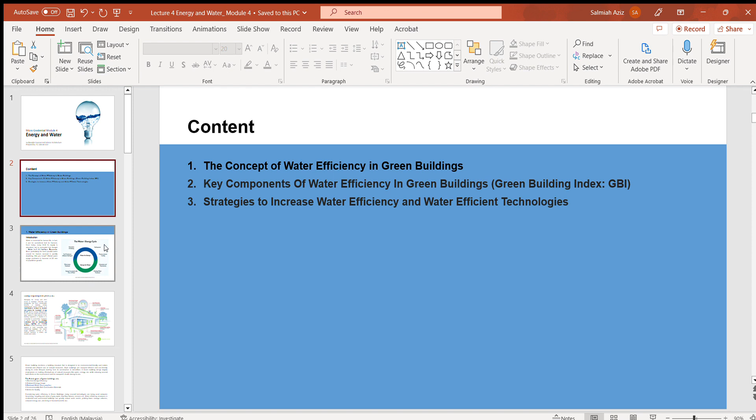So basically, we're gonna check on water efficiency in green buildings. Water is essential for human life. In fact, it can be considered fuel for humans. Even today many think its supply is abundant, but that thought is contradicted. Water is not a limitless resource. More particularly, the fresh potable water crucial for human survival is quickly depleting.

Did you know? Global water usage continues to increase at two times the rate of population growth.

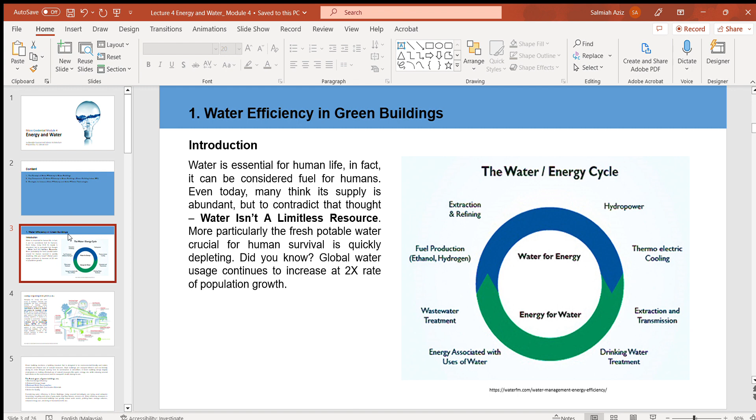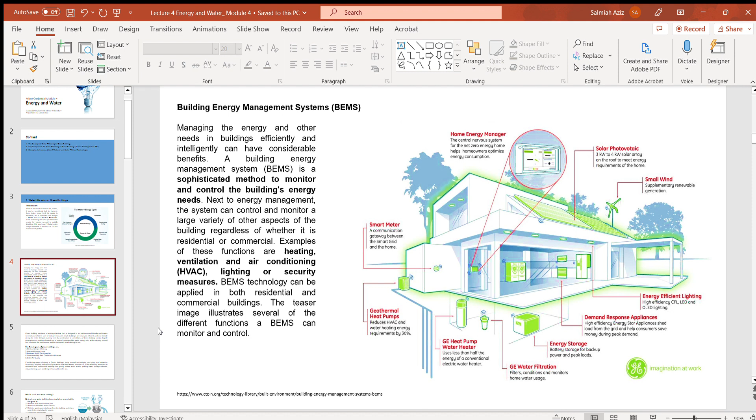We go to this, I'm gonna skip this one. But by the way, for nowadays design, in terms of water consumption or whatsoever, we could use a smart system to manage the amount of water every day. We can check, we could evaluate, and we could identify how much water every day we gonna use. So using this smart meter or smart control is really helpful to the building design.

Green building means a building structure that is designed to be environmentally friendly and makes minimal and efficient use of natural resources. Such buildings are resource efficient and eco-friendly during its entire lifespan, starting from construction to demolition. A green building design largely emphasizes making effectual use of natural resources like water, energy, etc., while reducing several bad effects on the environment and the occupant health during its use.

The 5 main gears of green buildings are site and design efficiency, reduce energy usage, reduce water consumption, environmentally safe construction materials, and better air quality. Okay, considering water efficiency in green buildings.

Today, there are so many technologies being used: rainwater harvesting, recycling and reuse of grey water, low flow fixtures, sensors, etc. Water efficiency measures in residential and commercial buildings can greatly reduce water waste, yielding lower sewage volumes, reducing energy use, and bringing in financial benefits too.

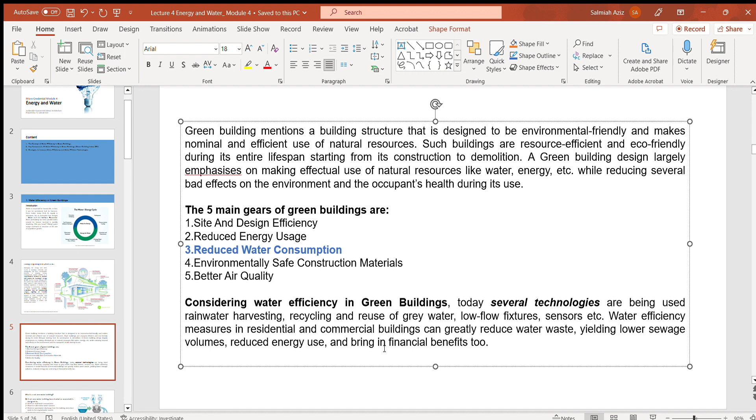There is something that you should look at and study in detail - it is about a net zero water building. What is a net zero water building? A net zero water building, constructed or renovated, is designed to minimize total water consumption, maximize alternative water sources, minimize wastewater discharge from the building, and return water to the original water source.

Application of reuse water, and also application of water efficient technologies. Net zero water creates a water neutral building where the amount of alternative water used and water returned to the original water source is equal to the building's total water consumption. The goal of net zero water is to preserve the quantity and quality of natural water resources with minimal deterioration, depletion, and rerouting by utilizing potential alternative water sources and water efficiency measures to minimize the use of supplied fresh water. This principle can be expanded to the campus level as well.

So if you look here, the diagram measuring net zero water. This is the elements of the net zero water building, where it is using alternative water from rain or reuse - we retreat the water as well. This is alternative water for the building. If you look into treated wastewater, this wastewater is already being used in the building, but we could treat it to reuse it again, especially for planting and washing as well.

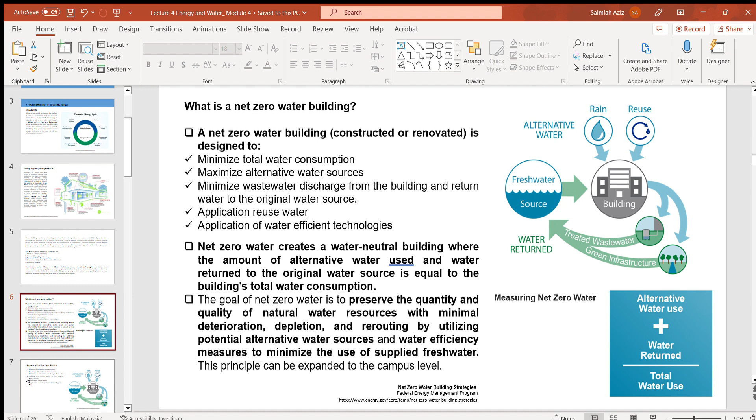Okay, and also green infrastructure where this is water return. So treated wastewater is returned to the building as a fresh water source. There is a calculation or formulation to measure net zero water, which is alternative water use plus water return equal to total water waste, total water use.

This is a very important input that you should look at in this module to check on net zero water building. Even nowadays, if you are an architect, designer, or engineer, it is recommended to design something green regarding water consumption. How is the occupant going to use the water in the building? We should look at this in detail.

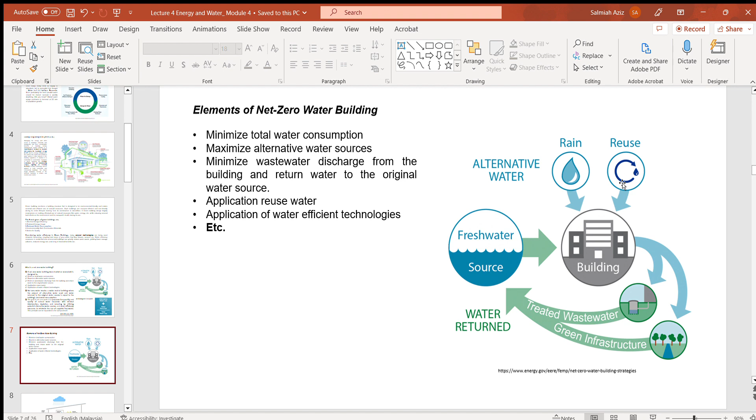Okay, net zero water building, same thing. This is how the elements of net zero water building look in the section drawing. We look here: drinking water sinks, hot water pressure tank, potable water treatment train, with UV carbon particle treatment.

This is the stuff collected from the rain. This is a vortex filter, collected from the rainwater. So this is rainwater harvesting: vortex filter, first flush tank, reservoir. If the rainwater is not filtered, we could just use it for the gardens. But if you filter it and also treat that rainwater using UV, we might use it for drinking water as well.

Okay, so this is the grey water tank filter, and here are the indoor grey water planters. By the way, for the grey water tanks and filter, it is not recommended for drinking. So it's only for outside or exterior use, not for the human body - not for drinks, not for cooking at the kitchen. I can say it is forbidden to use for our body. It is not recommended.

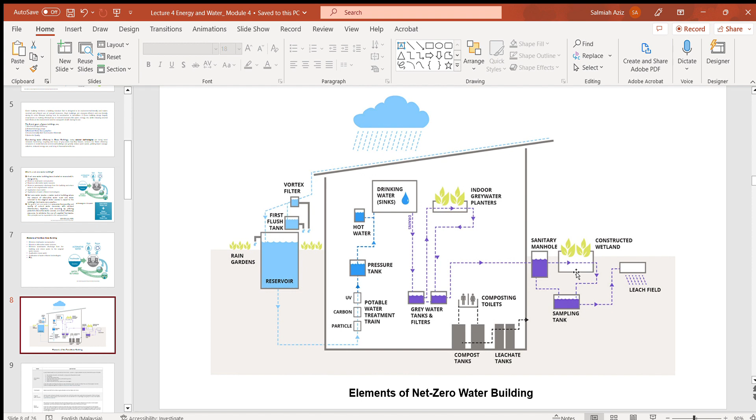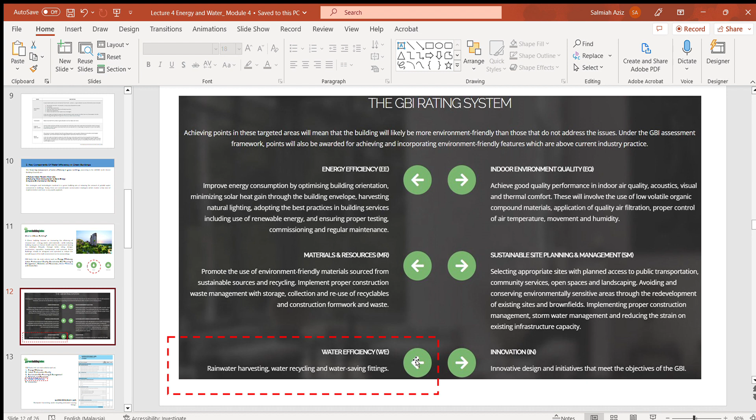If you look at GBI, there is water efficiency in the assessment. This is water efficiency, WE: rainwater harvesting, water recycling, and also water saving fittings. It is one of the GBI assessment criteria in Malaysia, to apply and deploy water efficiency for the building.

There are so many subtopics under water harvesting and recycling here for the GBI. You could check these notes, handouts, or sheets at the GBI website. You can find it there and download it.

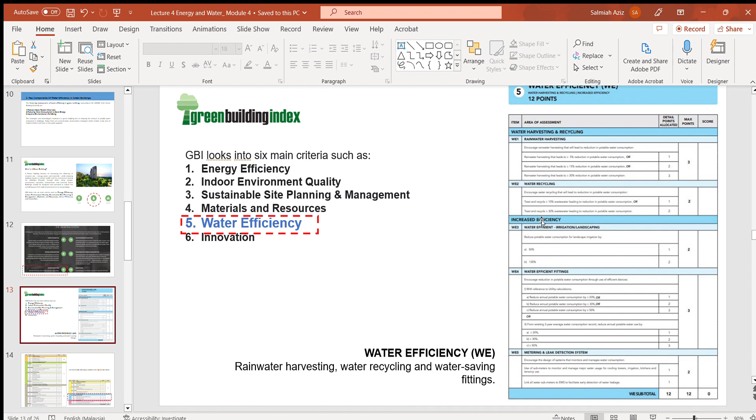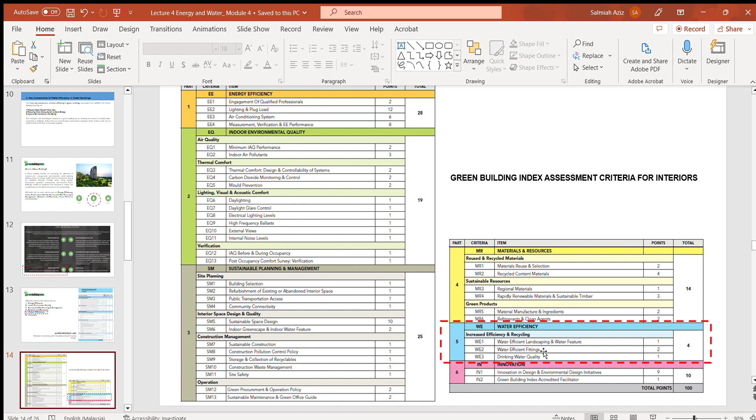In detail, water efficiency for the green building index assessment criteria for interiors includes WE1, water efficient landscaping and water feature; WE2, water efficient fittings, more relating to technology stuff; and WE3, drinking water quality. If we could apply these three elements in the design for water efficiency, you're going to get 4 points for GBI.

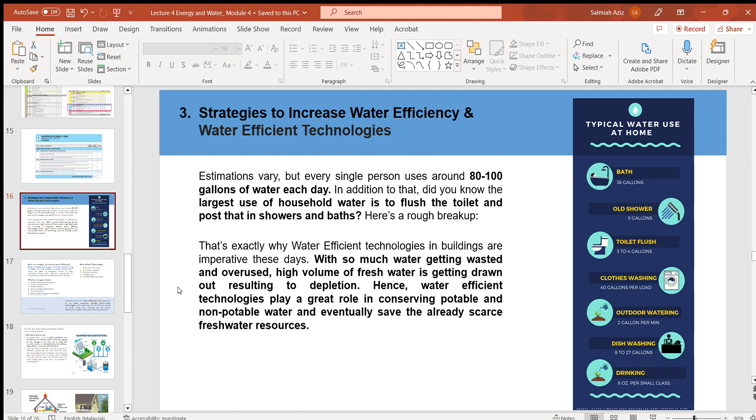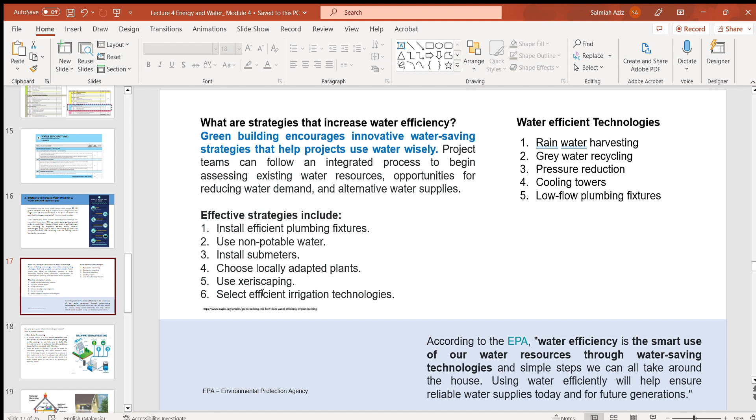Others are at the same detail level. This is more like strategies to increase water efficiency and water efficient technology. There are a few things we could use, such as effective strategies including install efficient plumbing fixtures, use non-potable water, install submeters, choose locally adapted plants for landscaping, and select efficient irrigation technology as well.

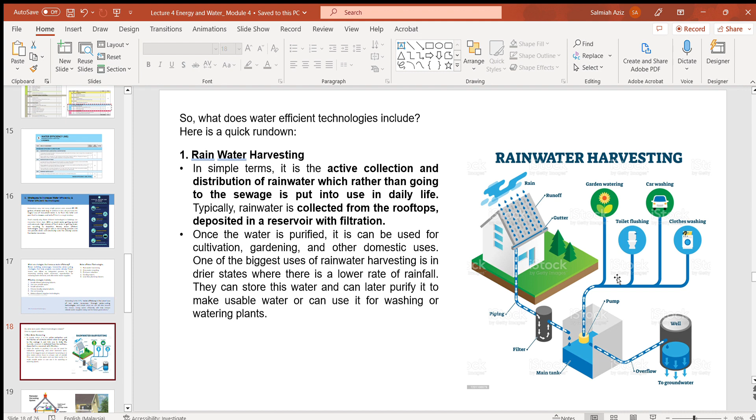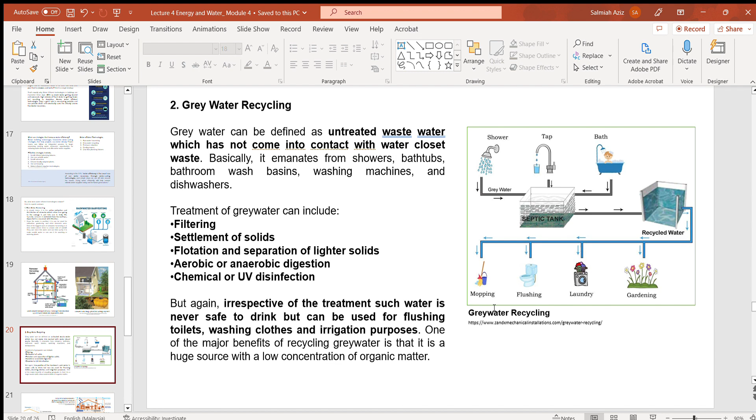One water efficient technology is rainwater harvesting, which I just mentioned to you, including the idea and the methods. And then grey water recycling, where we could use again the water that we have used in the building, reuse and recycle it back for the garden and also washing - this is the methods.

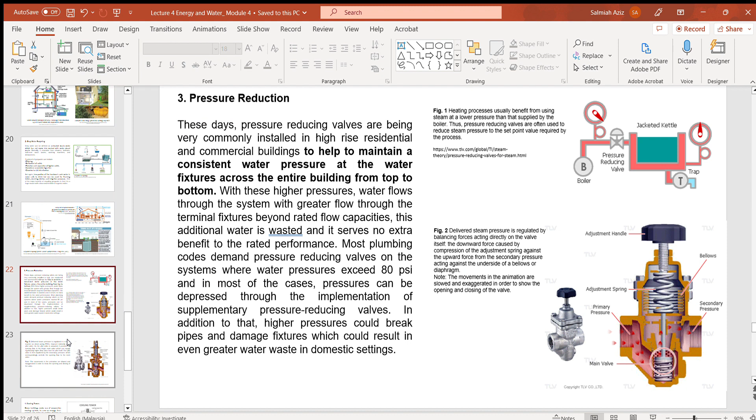Then pressure reduction as well, this is one of the water efficient technologies, this is the idea. And also cooling towers and low flow plumbing fixtures - if you could buy sanitary fixtures and plumbing fixtures that are really energy efficient for water, just find that. Okay, right, that's all.